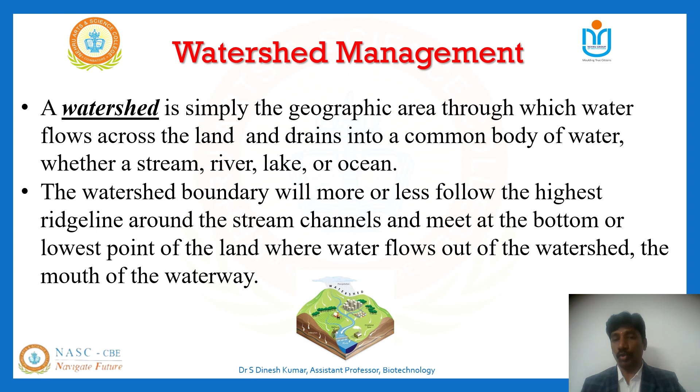What are the key features of the watershed? All the rainwater in a watershed flows downhill and collects into a single water body. It includes rivers, streams, hills, valleys, soil, vegetation, and even human settlements. The watersheds can be small like a village stream or huge like the Ganga or Amazon river basin.

In watershed management, most of the water comes from rainfall or stormwater runoff. The quality and quantity of the stormwater is affected by alterations like land mining, agriculture, construction of roadways, urban development, and human activities within the watershed. Usually the watershed is separated from other watersheds by naturally elevating areas.

This watershed is important to study because the surface water features and stormwater runoff within the watershed ultimately drain to other bodies of water, and this naturally collected water, through the channelized rainwater system, supports agriculture by providing water for crops and livestock, and also supports biodiversity including forests, rivers, wetlands, wildlife, and human settlements.

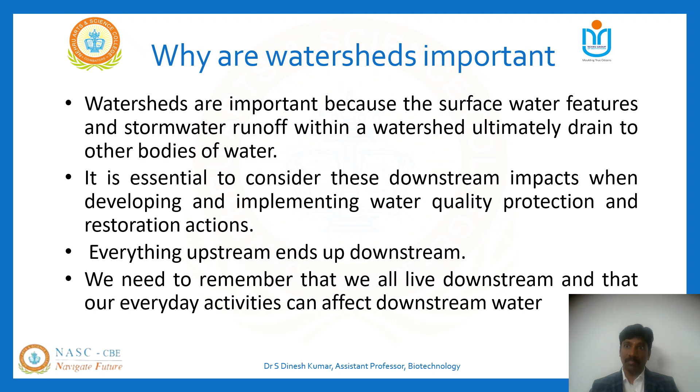Many towns and cities depend on the watershed for water supply, and a healthy watershed will prevent floods, droughts, and soil erosion. We need to remember that we all live downstream, and everyday activities can affect the downstream water too. So what is meant by the management of watersheds?

The management of the watershed, as management of the environment, has primarily focused on specific issues such as air, land, and water. Most efforts have resulted in decreasing pollutant emissions of air and water. This leads to improved landfills, remediation of waste sites, and contaminated groundwater, and it protects rare and endangered species, along with the design of best management practices to control water and contaminant runoff, and much more.

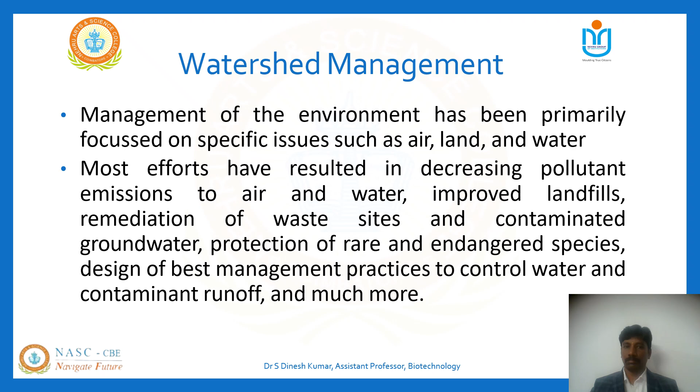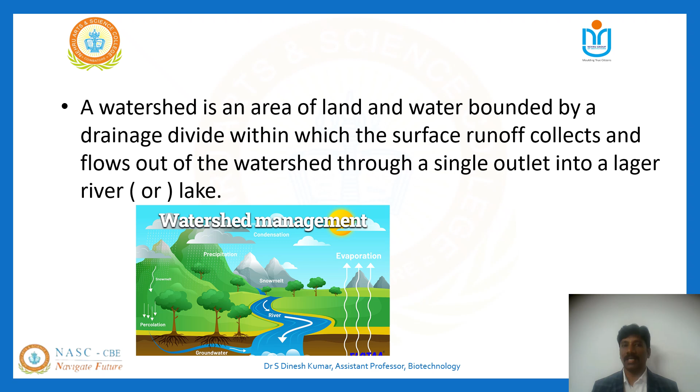So this management... the watershed is an area of land and water bounded by the drainage divide within which surface runoff collects and flows through a single outlet into a larger river or lake.

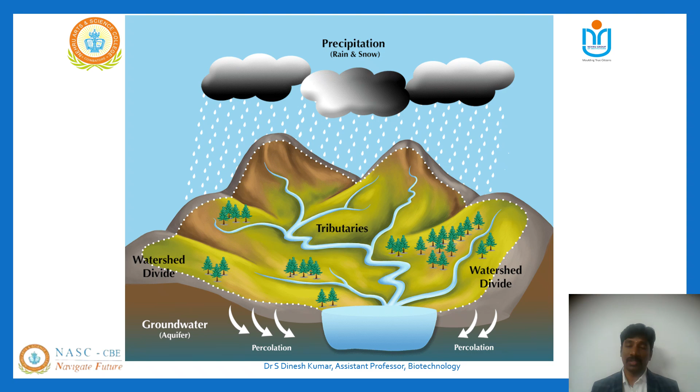Coming to the types of watershed—what are the different types of watersheds? These watersheds are classified depending upon the size, drainage, shape, and land use pattern.

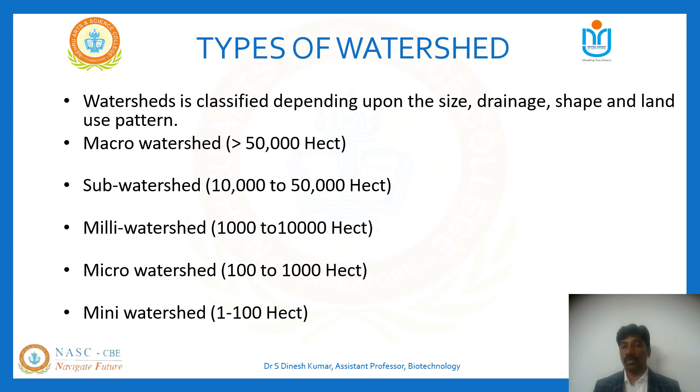First is the macro watershed, which covers more than 50,000 hectares. Next is the sub watershed, covering 10,000 to 50,000 hectares. Milli watershed covers 1,000 to 10,000 hectares, micro watershed covers 100 to 1,000 hectares, and mini watershed covers 1 to 100 hectares.

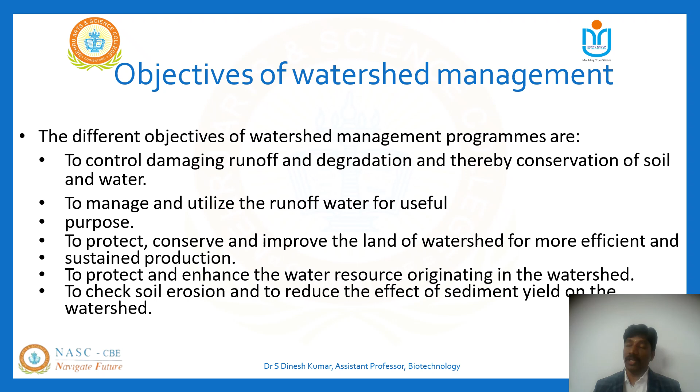Coming to the objectives of watershed management: first is to control damaging runoff and degradation, thereby conserving soil and water. Second is to manage and utilize the runoff water for useful purposes, and to protect, conserve, and improve the watershed land for more efficient and sustainable production, and to protect and enhance water resources, and to check soil erosion and reduce the effect of sediment yield on the watershed.

Also, to rehabilitate deteriorating lands, to moderate flood peaks, to increase the infiltration of rainwater, to improve and increase the production of timber, fodder, and wildlife resources, and to enhance groundwater recharge wherever possible.

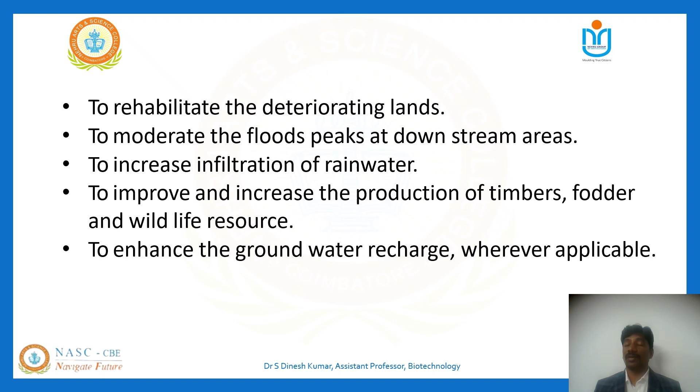Now let's see what are the factors which are affecting the watershed management system. We can classify these factors into four different forms: one is watershed characteristics, another is climatic characteristics, third is watershed operation, and fourth is land use patterns.

The success of these factors depends on several natural and human factors. First is size and shape, and second is topography. Topography is a landform which covers hills, slopes, and valleys, affecting how water flows. Steep slopes cause faster runoff and erosion, while flat areas allow more water to soak into the ground.

Next is soil type. Some soils like sandy soils allow water to infiltrate quickly. Others like clay soil hold water but may lead to waterlogging. So the soil quality affects agriculture, water retention, and erosion.

Next is vegetation cover. Trees, grasses, and plants help absorb rainwater and reduce surface runoff. Deforestation leads to soil erosion, poor water retention, and drought.

In the climatic characterization, we can see precipitation and the amount and intensity of rainfall pattern. The amount, intensity, and frequency of rainfall affect water availability. Heavy, short bursts of rain cause flooding and erosion, while long, light rains improve groundwater recharge.

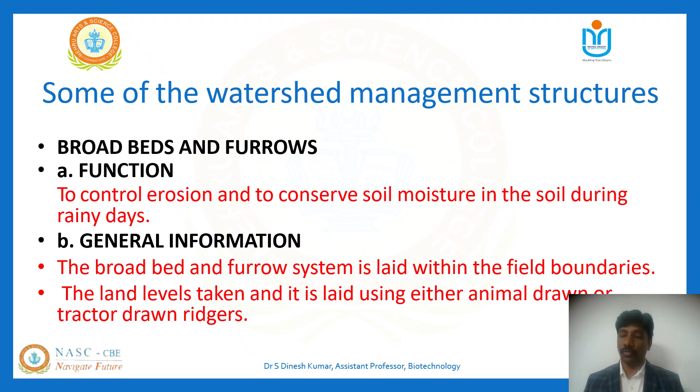Here are some watershed management structures. The first structure is broad beds and furrows. The function of this structure is to control erosion and conserve soil moisture during rainy days. This is a broad bed-like structure or furrow system laid on the surroundings or boundaries of particular fields. The land levels will be taken and used for animal-drawn or tractor-drawn ridgers. The cost of making these beds and furrows is about 1,800 rupees per hectare.

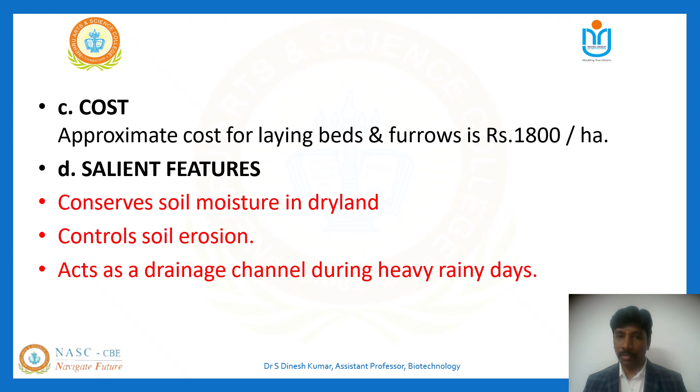The key features of broad beds and furrows: it helps in conservation of soil moisture, controls soil erosion, and acts as a drainage channel during heavy rainy days. So this is the bed-like structure and furrow channels.

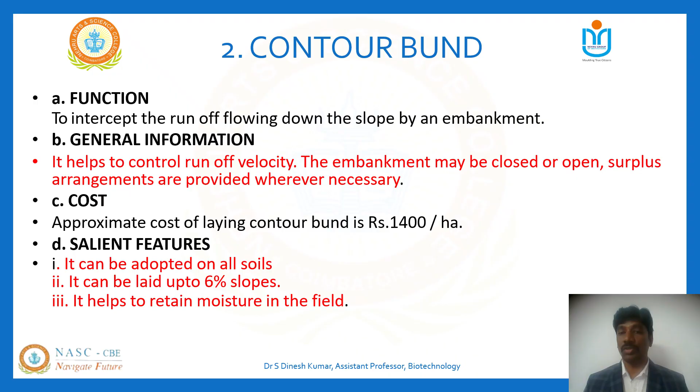The next structure is contour bund. A contour bund intercepts the runoff flowing down the slope by an embankment, helping to control runoff velocity. The cost of this structure is about 1,400 rupees per hectare. This structure can be adopted on all soils and can be laid up to 6% slopes, helping to retain moisture in the field. So this is the contour bund.

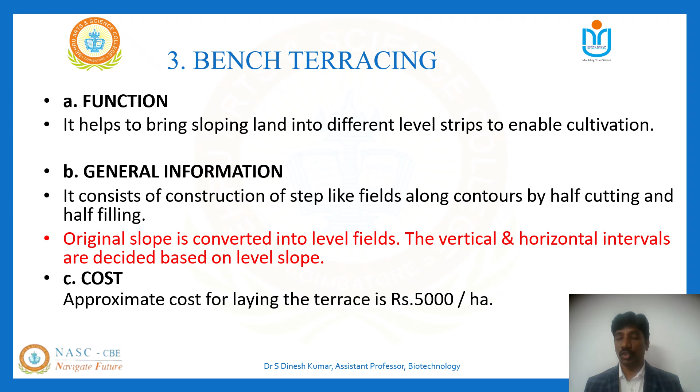So the third structure is bench terracing. This structure is helpful in bringing sloped land into different level strips to enable cultivation. The original slope is converted into level fields, and the vertical and horizontal intervals are decided based on the level slope. The approximate cost for this structure is about 5,000 per hectare.

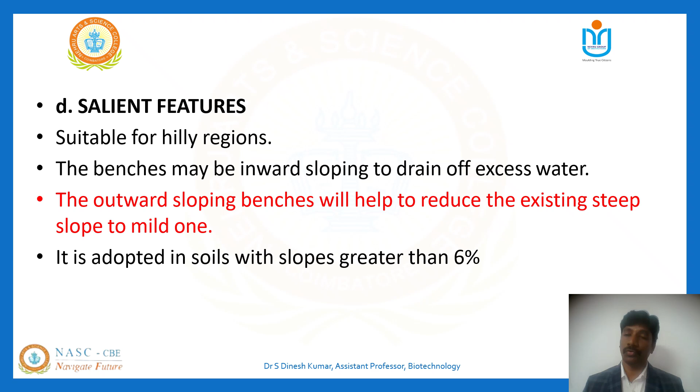The fourth one is micro catchments for sloping lands. It is useful for in-situ moisture conservation and erosion control for tree crops. Slopes ranging from 2 to 8% are suitable for constructing this structure, with soil type light to moderate. The bund height will be 30 to 45 centimeters, and it is best suitable for dry land horticulture and agroforestry. So the fifth one will be check dams.

Check dams are structures helpful in conservation of water, and they are normally low structures constructed across gullies, on small streams, and also long gullies formed by erosive activity of floodwater. There we can collect water and use it for irrigation purposes, and it cuts the velocity and reduces erosive activity.

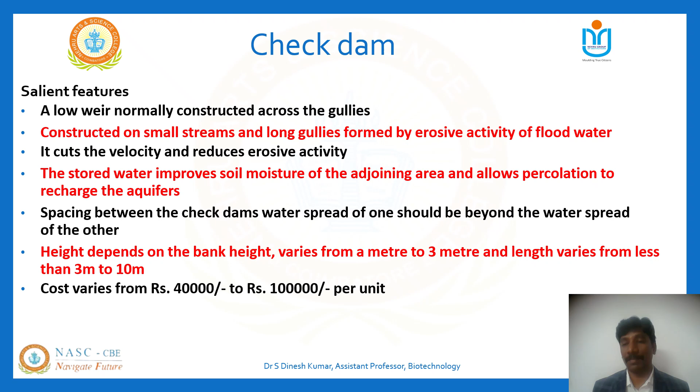The space between check dams should be such that the water spread of one goes beyond the water spread of the other. When constructing check dams, we want to keep this in mind. The height depends on the bank height, varying from 1 meter to 3 meters, and length varies from less than 3 meters to 10 meters.

The cost varies from 40,000 to 1 lakh per unit when we construct these check dams. This is the check dam, which can be built across streams or long gullies. So next, the sixth one will be the percolation pond.

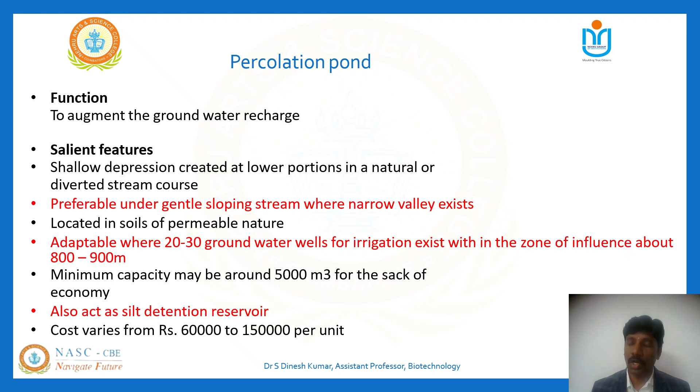The function of this percolation pond is to augment groundwater recharge. We can prefer a gentle sloping stream where a narrow valley exists, adaptable where 20 to 30 groundwater wells for irrigation exist, with a zone of influence of about 800 to 900 meters. It will also act as a silt detention reservoir. The cost varies from 60,000 to 1,50,000 per unit. This is the percolation pond where we can find it and store water.

So next one will be stone barriers. Stone barriers are step-by-step structures where we build using stones, and we can use them for irrigation purposes.

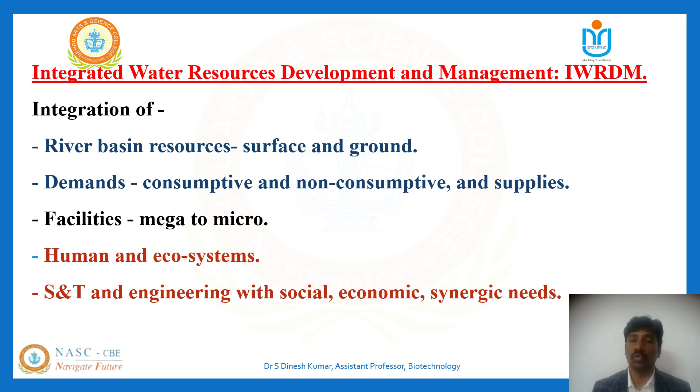Next is the Integrated Water Resource Development Management, that is IWRDM. It involves the integration of river basin resources, surface and ground water. Demands will be consumptive and non-consumptive, and also supplies facilities from the mega to the micro level. Human and ecosystem needs are involved in this water resource development and management, and science, technology and engineering combined with social, economic and synergic needs will be part of this system. So why is this water resource development management system important?

India's land resources, irrigation and food production are top priority, but India has 2% of the world's land, 4% of the fresh water, 16% of the population, and 10% of its cattle. Out of cultivated area, 37% is irrigated, producing 55% of the food, while 63% is rain-fed, producing 45% of the 200 million tons of food. In 50 years, the ultimate proportion could be 50:50, producing 75:25 of the required food.

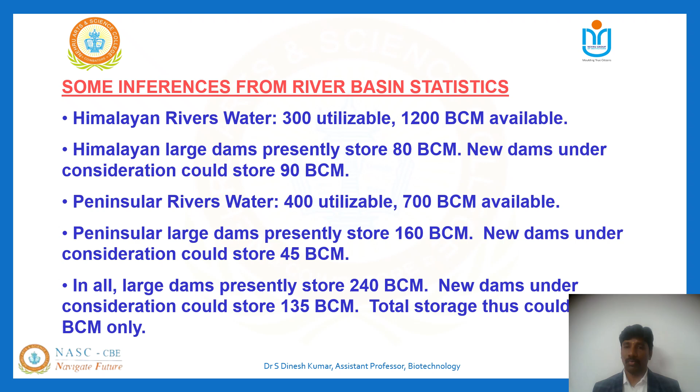Talking about river basin statistics, Himalayan river waters will have 300 utilizable and 1200 BCM available. Peninsular rivers water will have 400 utilizable and 700 BCM available. Large dams presently store 240 BCM, and new dams under consideration could store 135 BCM. Total storage that could be reached is only that much.

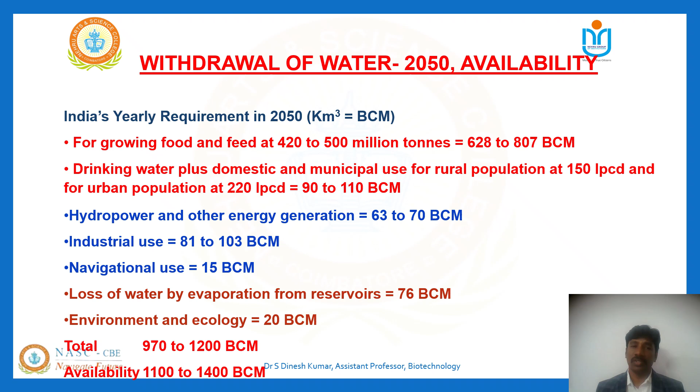So withdrawal of water in the year 2050, the availability will be somewhat less when compared to this. So we want to maintain the particular management system, and we want to generate more amount of water, using it for purposes like drinking water, domestic and municipal purposes, hydropower and other energy generation, industrial uses, and navigational uses.

Where does this water come from? From new dams, inter-basin transfers, groundwater, demand management, water savings, water productivity, trade, and food sheds. So watersheds can be developed, and it is about the hydrology of the watersheds.

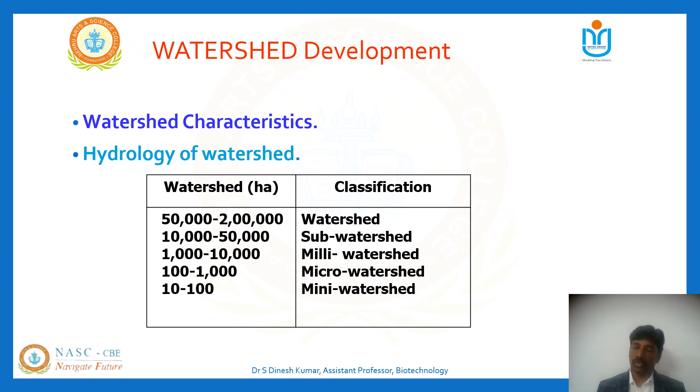Watershed development involves particular parameters of the watershed like size, shape, physiography, climate, drainage, land use, vegetation, geology and soils, hydrology, hydrogeology, and socioeconomics.

Coming to watershed modeling - it is a process of using computer-based tools or physical models to simulate how water flows, drains, and behaves within a watershed area. It helps scientists, engineers, and planners understand water movement, rainfall and runoff, flood risk, soil erosion, water availability, and the impact of human activities.

Watershed modeling steps include formulation, calibration, verification, and application. A watershed model consists of an input function, output function, and transform function.

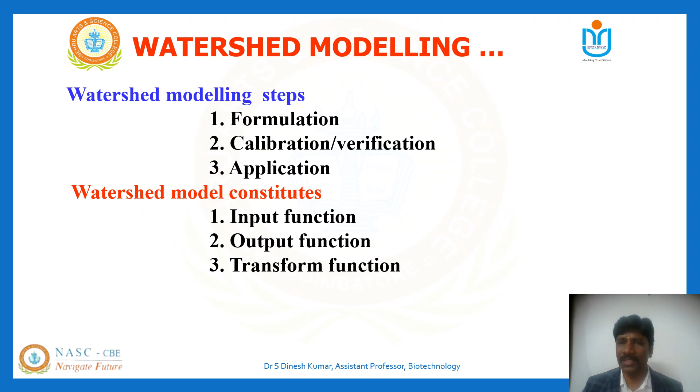What is the purpose of watershed modeling? To predict water flow patterns, to design effective watershed management structures, to manage floods, droughts, and water resources, to plan sustainable agriculture and development, and to simulate the effect of land use changes, deforestation, and urbanization.

When talking about watershed models, physical models, mathematical models, and computer simulation models are available. Here you can see how the watershed modeling has been designed.

First, precipitation and interception storage will be there, then surface storage. Surface runoff directly goes to direct runoff, and the channel process occurs. From surface storage, it directly goes to interflow, and interflow directly goes to groundwater storage.

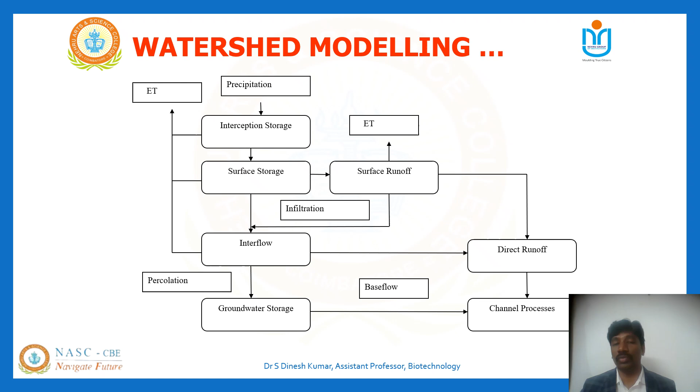Popular watershed modeling has several different software options: SWAT, the Soil and Water Assessment Tool; HEC-HMS, Hydrologic Modeling Systems; MIKE SHE, a detailed surface-groundwater simulation; and WEPP, Water Erosion Prediction Project.

The steps involved in watershed modeling: first, define the watershed boundary. We want to collect data including socio-economic field data, topographic maps, GIS analysis and information, and then we want to create a model - that is the watershed system or model we want to create.

Then we input the data into the model, run the simulations, and analyze the results - where water flow will be, how much water flow will be, and control sedimentation levels, groundwater recharge, etc. Then we make decisions about whether to build check dams, change crop patterns, or resize with another model.

The results of the water management system rely on water security, enhanced agriculture yield, improved living standards, sustainable land use, and community consensus. This will help protect against flooding and drought risk, optimize water use, aid in planning water conservation structures, support climate change impact studies, and improve agriculture and urban planning.

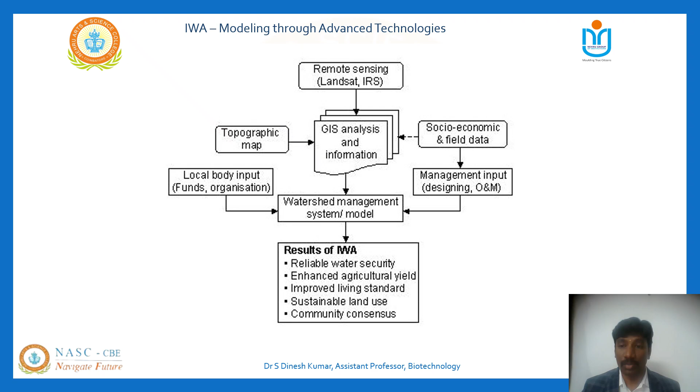In simple terms, this watershed modeling system with advanced technology is like creating a virtual or miniature version of the watershed to see how water behaves, so we can make smarter decisions for managing these particular watersheds.